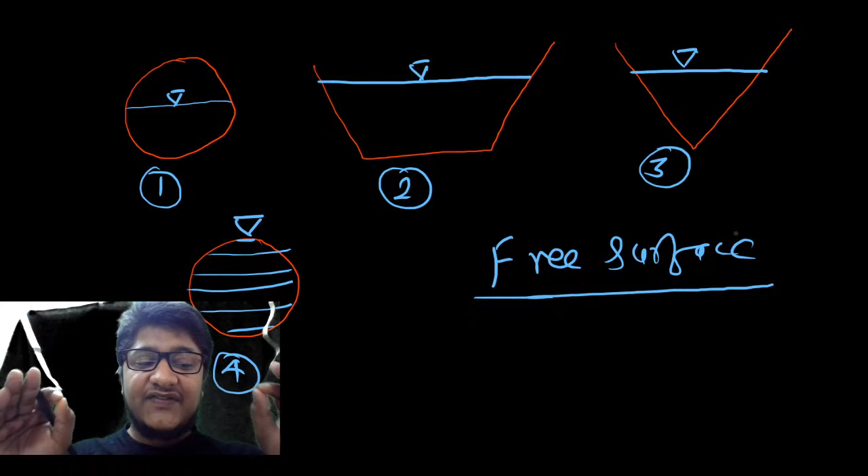I'm just giving you a small and clear definition to all of you. Free surface is the interface between a moving liquid - in our case that is water - and an overlying fluid medium. That overlying fluid medium is nothing but air, that is atmospheric air. So wherever you will find a fluid is moving, that fluid here it's water, so wherever the water is moving and over that air is overlying, that interface we call as free surface.

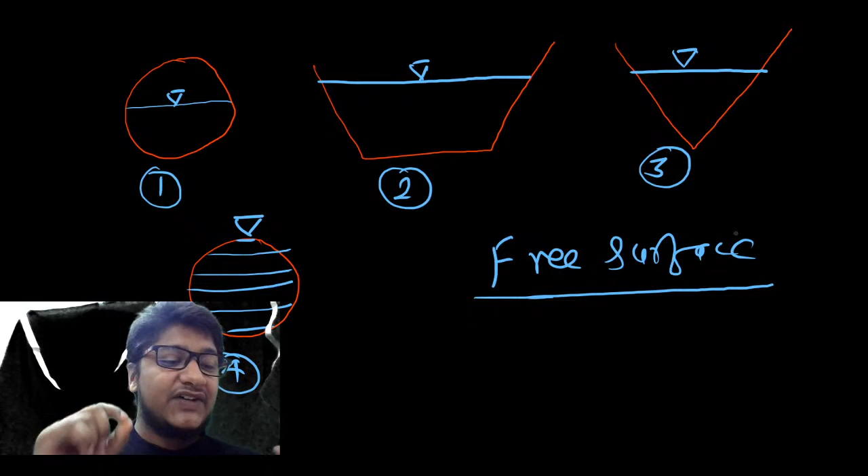And this interface we will find in every diagram. Like the first diagram, you will find here, this is the interface, because this is air and this is water. Here also this is water, this is air. So this is the interface. This is the identification mark of open channel flow. You can find, or you can tell, or you can explain, or you can select the open channel flow just by seeing this free surface.

So what happens with this fourth diagram? Why is this not an open channel flow? This is the question - what happened with this fourth diagram?

I think I have already told you in the environment part while explaining the design of sewer what is the difference between a pipe flow and a flow in pipe. This difference already I told you, yes or no?

In that fourth diagram, if you notice, full flow is happening, and whenever in a pipe full flow is happening, we call it pipe flow. Whenever in a pipe full flow is happening, that flow will not be because of gravity, that flow will be because of pressure. In that pressure flow you will not find a perfect free surface. Are you able to find that free surface in this diagram? No. Here you are able to find it, here you are able to find it, here you are able to find it. So in diagrams 1, 2, 3 you are able to find that free surface, but in diagram 4 you are not able to find that free surface. That is the reason, friends, in the fourth diagram it's not open channel flow, it's pipe flow. So whether you have understood this point or not.

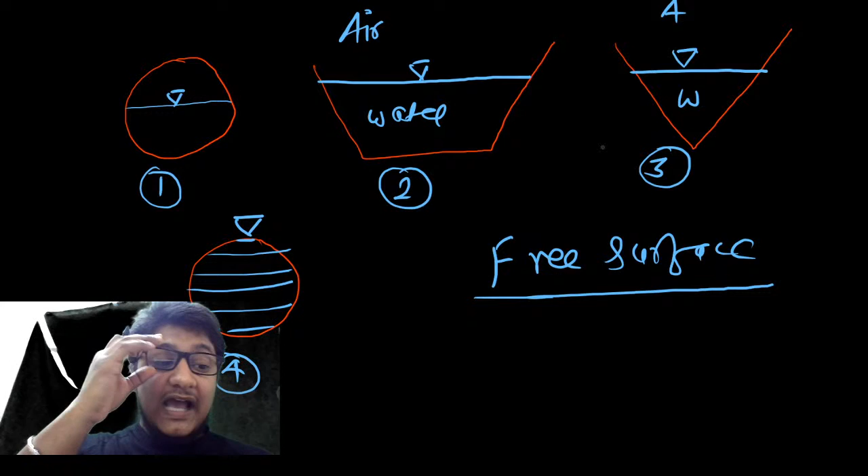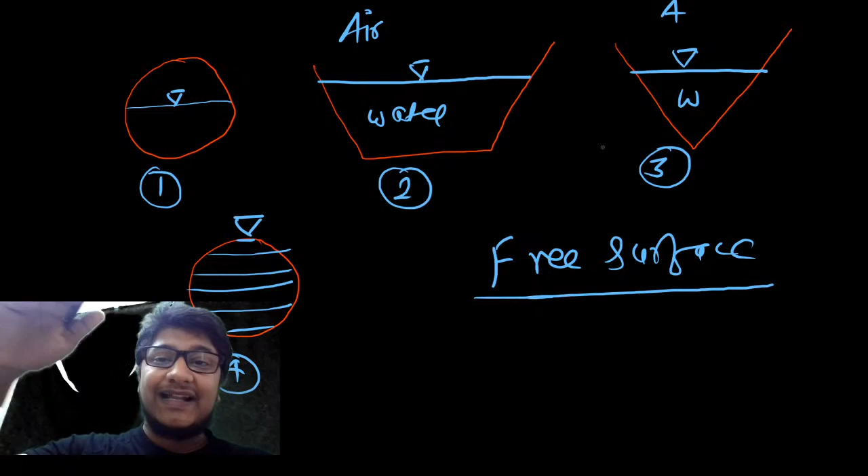Now see, free surface is the interface, but not all interfaces we call free surface. Only that interface in which a moving medium, that is water in our case, is overlined by air or overlined by a gas, that is what we call free surface. Like if you are mixing air and if you are mixing oil and water, in that also one interface will be there, but that interface we cannot call free surface.

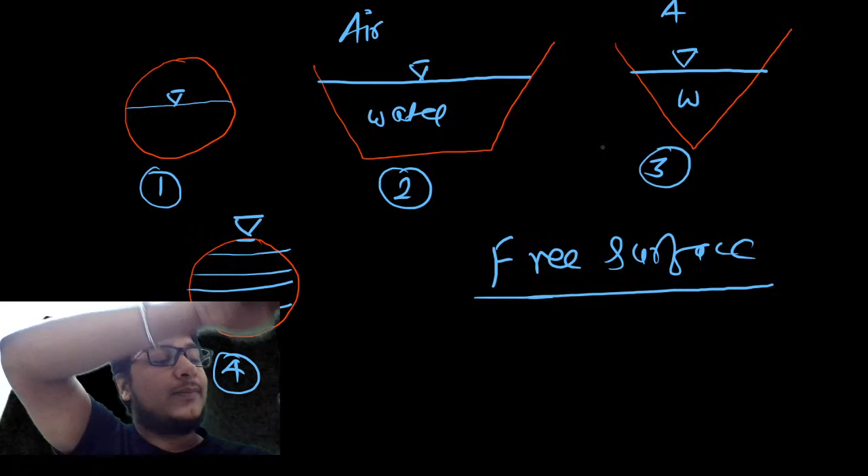Does it make sense? Shailesh has doubts, sir. What is it, pipe flow or flow in pipe? That is flow in pipe. There is a pipe, and inside the pipe flow is happening, so that is flow in pipe. But in that pipe, flow is not going through full depth. It is going through partial depth, and whenever it is partial flow, air will enter. Air entering means that moving water is overlined by air, and in that case we call this a free surface, and with that free surface it is called open channel flow.

Yes, Lakshmi, your point is clear. In pipe flow, we call it pipe flow when the flow is full. Whenever the flow will be full, it's because of pressure, the dominating force will be pressure. And whenever the pipe is not full, that means some air is present in it, or air is overlaid, so in that case we call it open channel flow.

Is everything clear? Everything is clear or not? I'm going through very basic things, guys, so if you have any doubt, please ask.

Yes, very good, Hacker Khan. The first case, the example is sewer line, that I will introduce you, that I will tell you, but as Hacker Khan is telling, I'm just quoting that part.

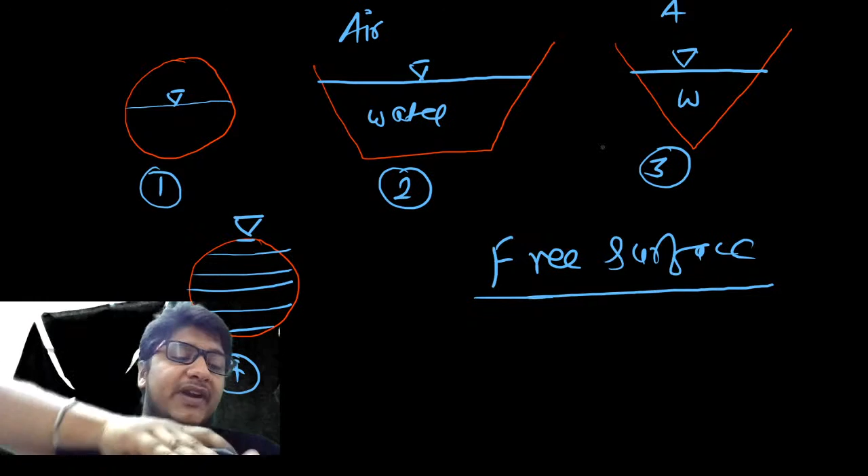Top portion closed or open, no effect. We only want a moving liquid and above that an overlying fluid medium. That's the only thing we want.

Open or closed, no need to worry about that. We only need to see one thing. That's the reason I told you, wherever you find a free surface, you can blindly tell this is open channel flow. But you have to be very clear about the definition of the free surface. What is free surface? I'm telling you again.

If you want, note it down. Free surface is the interface between a moving liquid and an overlying fluid medium. Everyone note it down, this is the definition of free surface.

On the free surface, pressure will be uniform and constant throughout the length of flow.

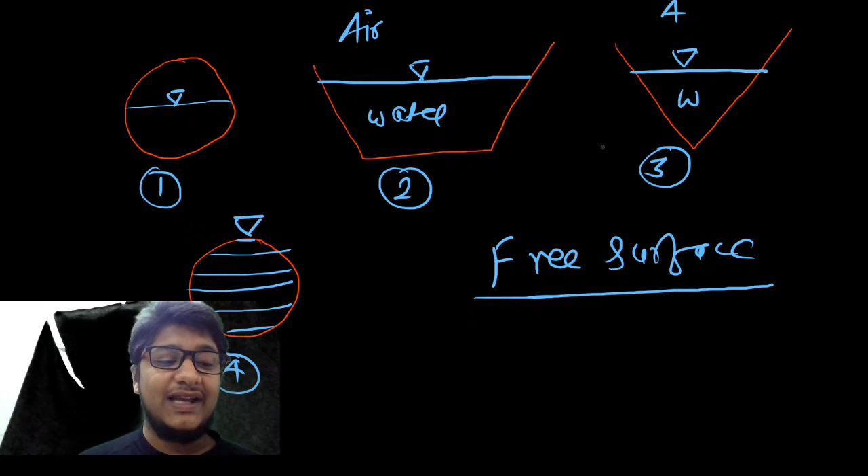Is it clear? Is the point clear?

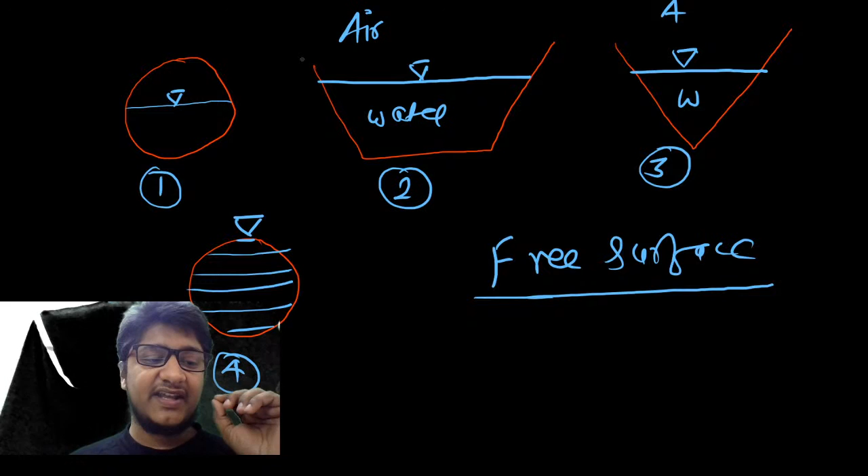Below that, everyone write down: in civil engineering, that moving liquid is water, and the overlying fluid medium is atmospheric air.

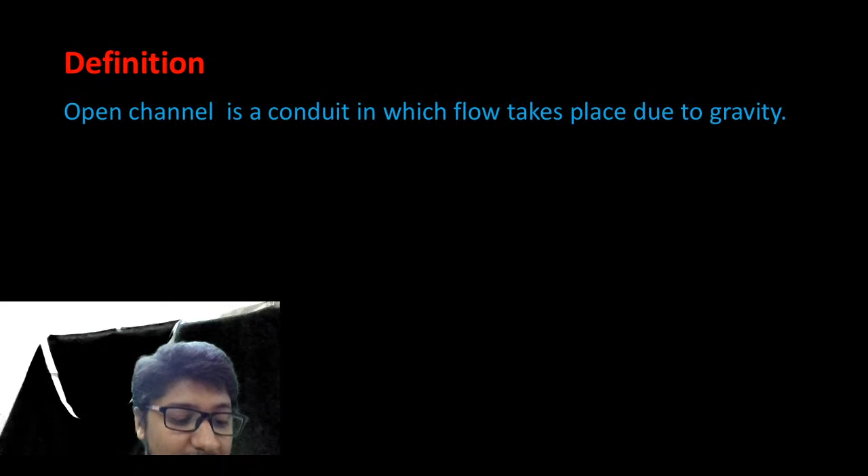So is that point clear to all of you? Because we are moving to the next slide, the definition part. I think it's already clear, but I'll clear it again. Yes, Avinash, flow in barrage, river, everywhere we only go for open channel flow. That is the reason open channel flow has come into your topic, and that is why we are discussing it so much.

So coming to the definition part, understand this, guys. Open channel is a conduit in which flow takes place due to gravity. Open channel is a conduit, conduit means pipe, in which flow takes place due to gravity.

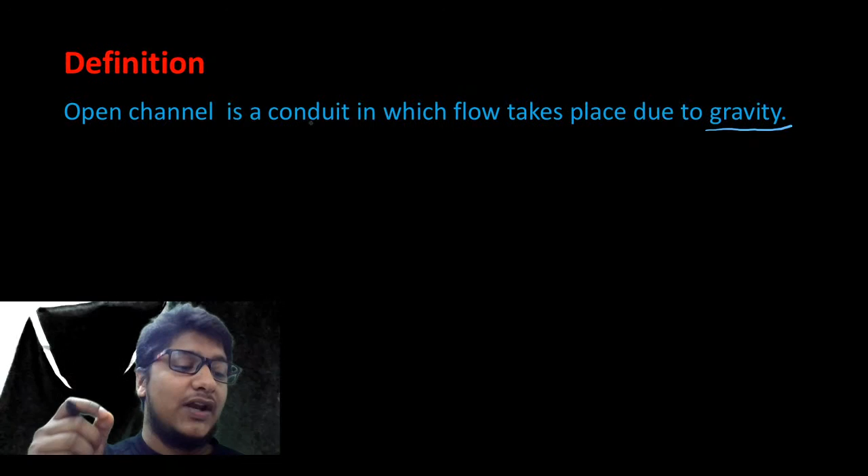Now again the basic concept. If the flow is because of gravity, which law will be useful? Which dimensionless number will be helpful for us to define that? Can you guys tell me? If you have studied the FM part, you can definitely tell that. If not, it's okay, I will tell you. Which dimensionless number will be helpful for us to define that?

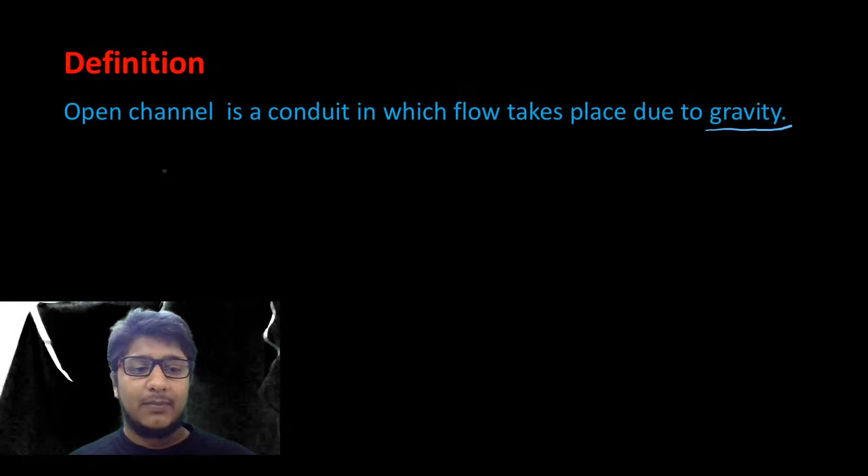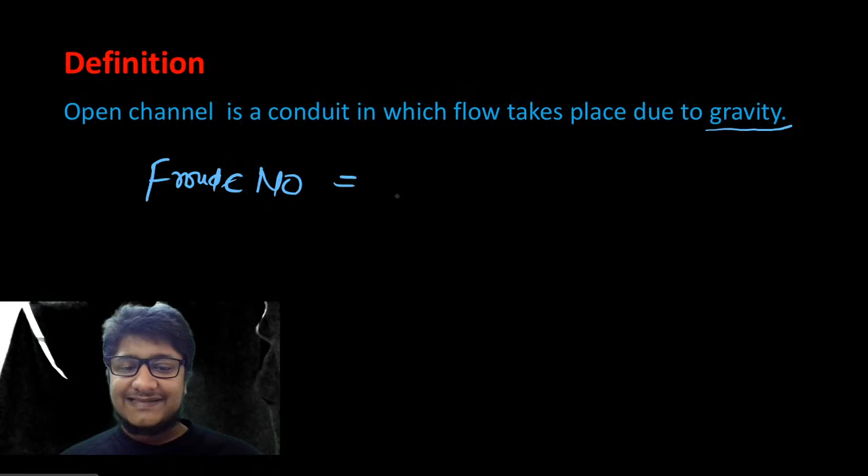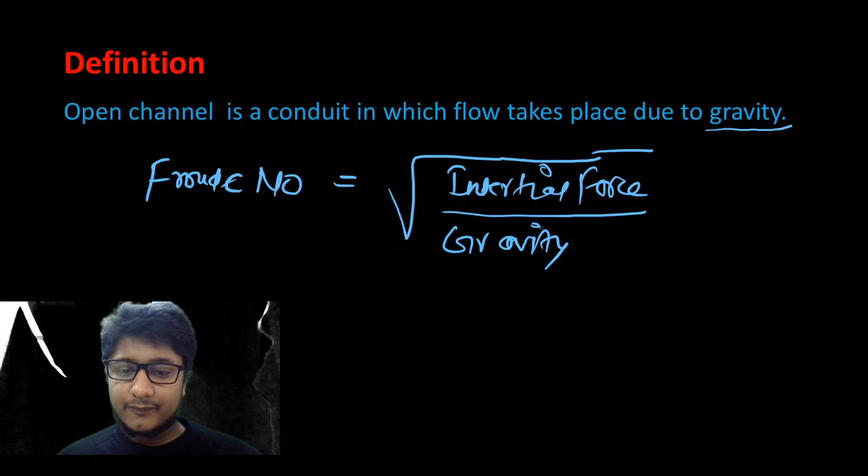It's the ratio of inertial force upon gravity force, inertial force upon gravity force.

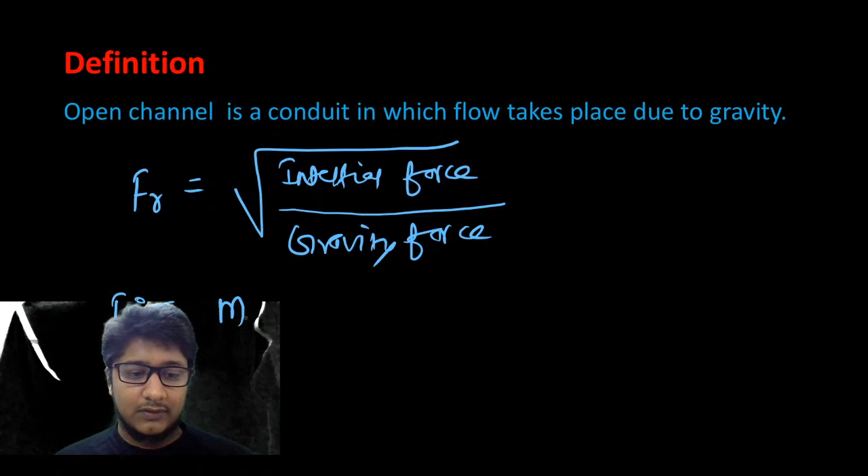Okay, I will write on the right side part, thank you for the suggestion. So what is Fi? First First of all, that is mass into acceleration, and you know acceleration can be written as velocity upon time. This mass upon time we can write as mass rate of flow, you should know this, you've studied it in FM.

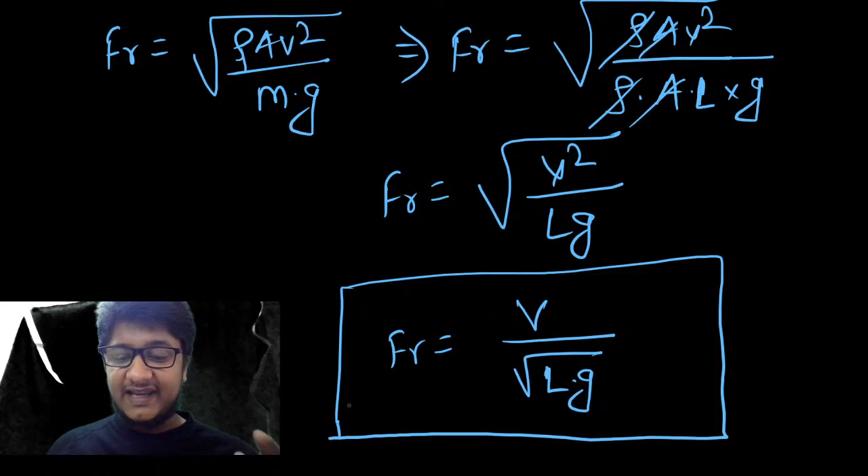Here I think you all have understood what is Froude number, that is v upon root under Lg, and this L value will change whether it's a circular section or non-circular section. That I will tell you when it will change and how it will change. That I will tell you later. Is that clear? Anybody having any doubt? They can ask me, or else I will go to the next part.

Faizan is asking, sir, in open channel flow, how dia will come? Faizan, as I told you, right now I have only given you the derivation of the Froude number formula. I will tell you in detail why diameter will come in circular section and why diameter will not come, or what thing will come in non-circular section. I will tell you that. Don't worry.

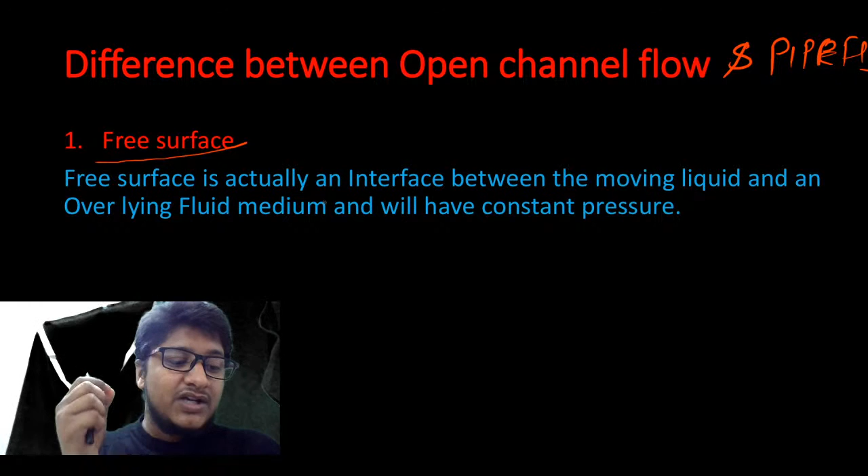Now if I tell you about negative pressure, can you guys tell me any example where you have seen negative pressure in a pipe? That example many people already know.

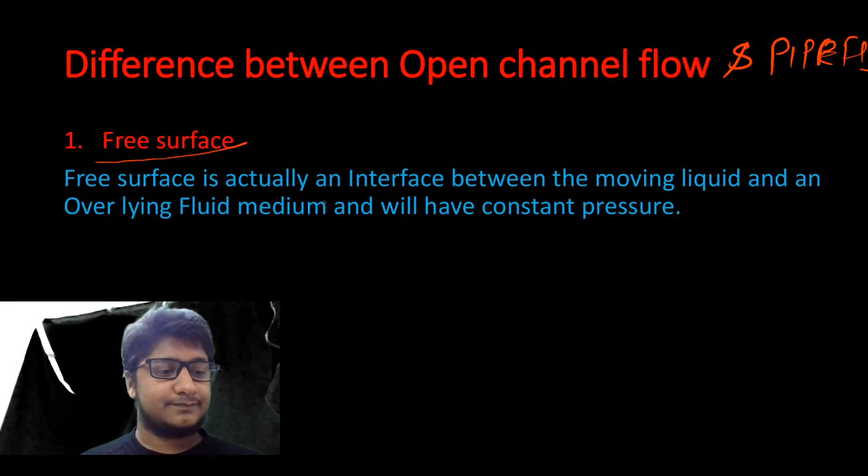Very good, Shubham, very good. It will be a siphon pipe. Since in a siphon pipe, you know that negative pressure also develops there.

That's something we call vacuum. Yes, petrol. Lakshmi, have you also taken out petrol from your father's bike? Oh, that's great, good to know that.

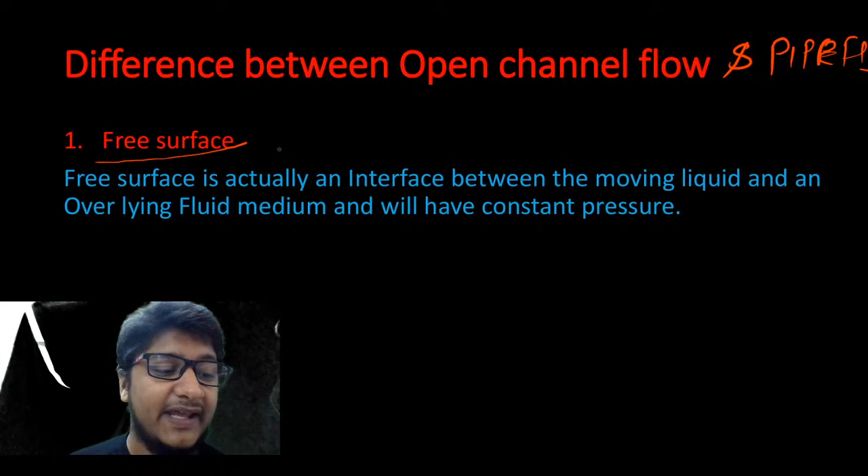So sometimes fluid mechanics is required for a thief also. They also know that fluid mechanics has a very wide application. So without knowing the siphon pipe concept, if somebody is taking out petrol from your father's or friend's bike, that is not good - you have to know the basic concept also for that. Then in less time you will be able to take out more petrol.

Is that clear? Did you understand the pipe flow part - how with the help of free surface we have differentiated open channel flow and pipe flow? Yes or no?

So next parameter is direction of flow. Avinash mentions piston, yes, that is also one of the examples - in a piston also we try to develop vacuum pressure in such a way that water can be sucked out.

Now let's talk about direction of flow. First I will talk about open channel flow. In that, this is your channel bed. Everyone look here - this is your channel bed, and this is your water surface line.

And this is your total energy line. And this thing I am taking as reference - this is your datum line. Everyone understand that part?

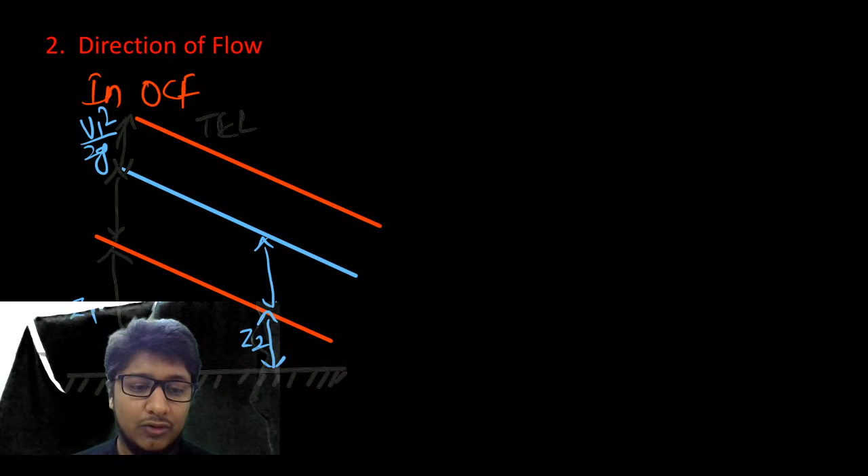How can you find out the pressure head? Can you guys tell me? If you have studied FM, can you tell me how we can find out the pressure head part in open channel flow?

In open channel flow, how can we find out the pressure head part? I'm not asking you the formula, I'm just asking you the measurement device. Can anyone tell me any device?

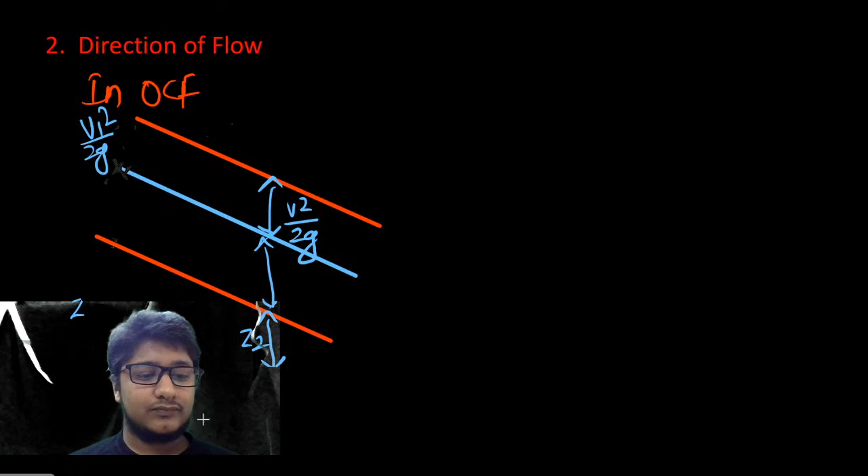So this is your datum line. Now I think you can see this part, this color is visible, guys. So some people are telling barometer, some people are telling pitot tube, some people are telling piezometer. Everything, whatever devices you know, tell me everything. Somebody will tell venturimeter. Very good, very good.

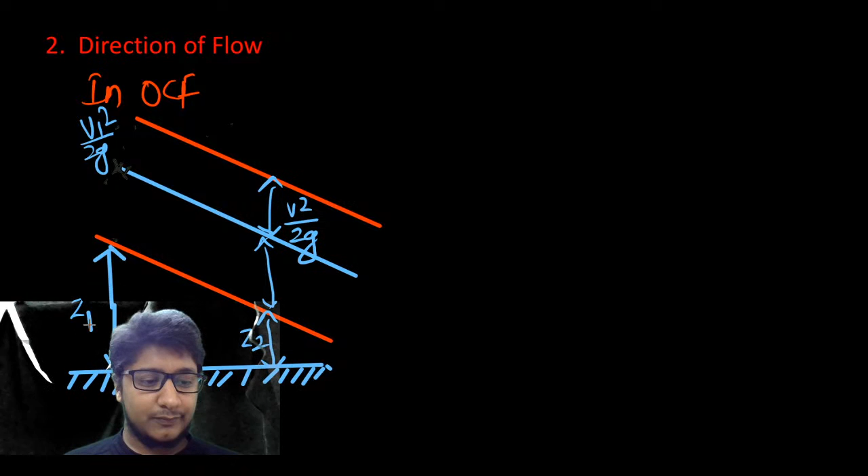Okay, so Lakshmi, that is a crime. If you are telling piezometer for velocity, that's a crime, Lakshmi. Understand everyone, the device which we will use to find out the pressure, that is pressure head, is the piezometer.

So you know that whenever we insert a piezometric tube, up to what level will the water come? Can you guys tell me? For example, I will show you that. If I insert the piezometer here, up to what level will the water come? Can anyone tell me?

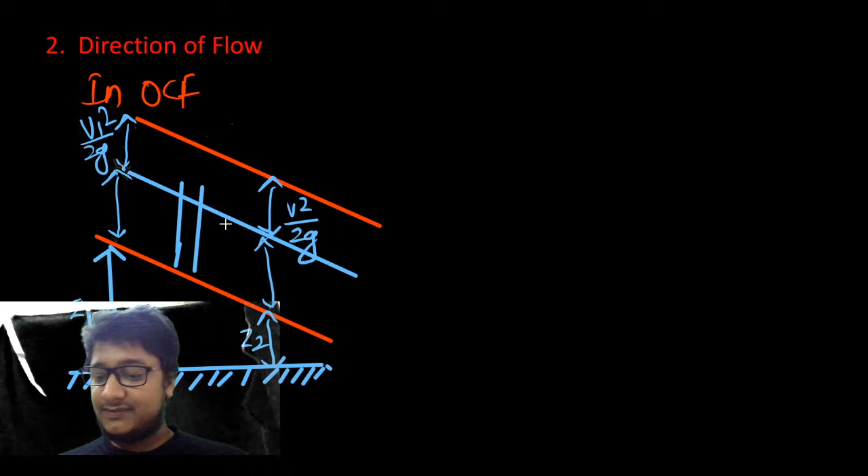If I use a piezometer, can you guys tell me up to what water level it will come? As soon as you insert the piezometer, water will rise. So up to what level will that water rise?

Lakshmi is having confusion between piezometer and pitot tube. Lakshmi, this part I have to deal with in FM, but just for you I am telling you: piezometer is for pressure measurement and pitot tube is for velocity measurement. That is a totally different part. Pitot tube is based on the Bernoulli principle and piezometer is based on the manometric principle. So totally different things - one is a pressure measuring device, one is a velocity measuring device.

Whoever is telling barometer - barometer is for atmospheric pressure measurement, not for water pressure measurement.

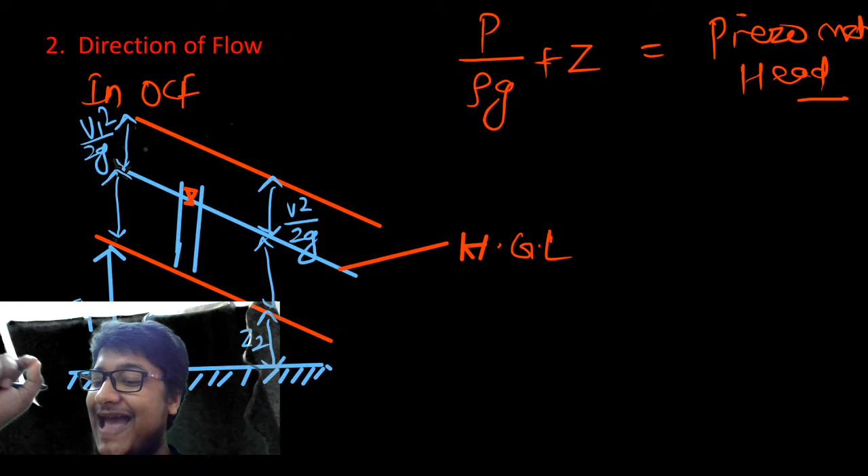Whether you guys are aware of gauge, absolute pressure and these things or not, because you are asking too much doubt regarding that. Do you know what is gauge pressure, what is absolute pressure, what is atmospheric pressure? If you guys will reply no, then I will explain that part also, because it's very important for you to understand. What is absolute, what is gauge, and what is atmospheric pressure, because I will use that term so many times. I want a reply from all of you guys.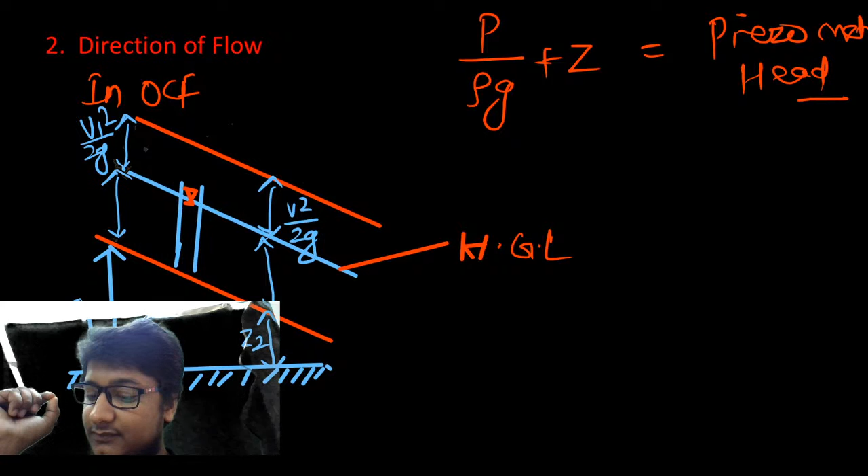Yes, Faizan, piezometric head remains constant at all points of HGL. Okay, so you guys are telling me you don't remember, so before going further I have to explain that part because you guys are asking this question.

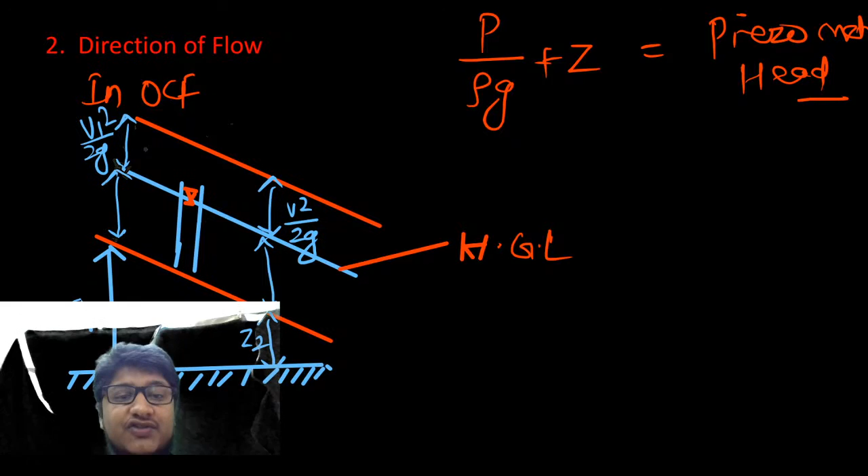Okay, so for you guys I'm explaining that part. What is absolute pressure, what is gauge pressure? That's a very basic thing. Okay, listen everyone, now everyone understand that part.

See, this is your zero pressure line. This is your zero pressure line. Everyone understand? Then I will ask you a question also. Zero pressure line. Now in this part, see, this is your zero pressure line, this is your atmospheric pressure line.

Now you will ask, sir, where did this atmospheric pressure come from? See, you know that above you so much amount of air is there, and you know that air will give some pressure to you. Yes or no?

That is the reason if you are going above on the hill surface or hill part, you are feeling a little bit uncomfortable. Why? Because if you are going above, the pressure is going down. Why is it going down? Because that pressure is a measure of rho g h.

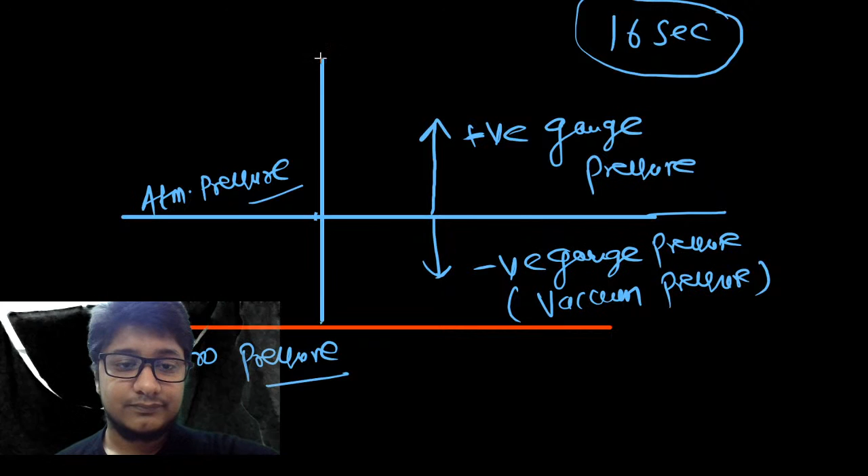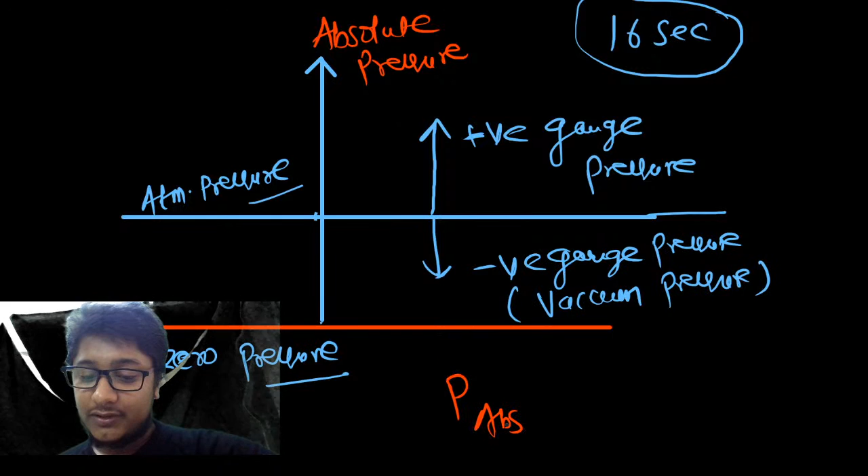Now understand this. If you are measuring your pressure from zero level, then this pressure we call absolute pressure. So I'm just giving you a general definition.

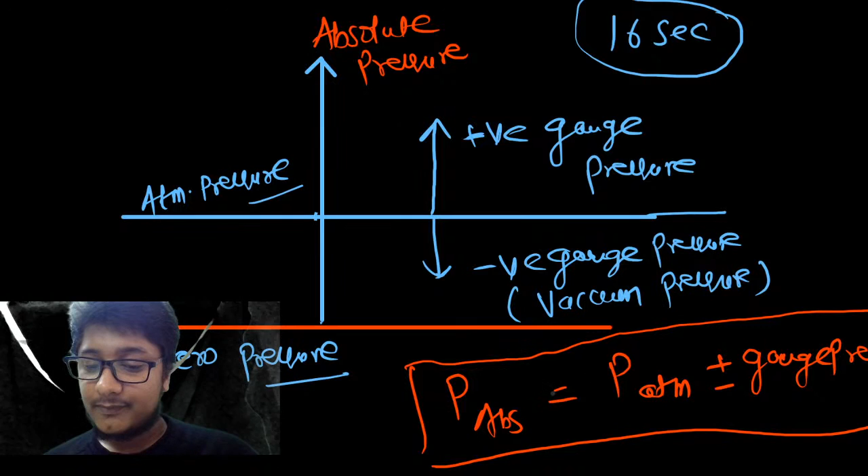P absolute will be equal to P ATM plus or minus vacuum pressure or gauge pressure. Don't say vacuum, always use gauge. This formula you need to remember. P absolute pressure will be equal to P atmospheric pressure plus or minus gauge pressure.

Why have I written the plus and minus part? Because you know that gauge pressure can be negative also, meaning it is lesser than atmospheric pressure, and it can be positive also, meaning it is more than atmospheric pressure.

With respect to atmospheric pressure we call it gauge pressure. How much pressure is more or less, that's what we call gauge pressure, and the reference point of it is atmospheric pressure. The reference line I have drawn is atmospheric pressure. Why have we taken atmospheric pressure as a reference line? Because it is present at each and every place at the same level.

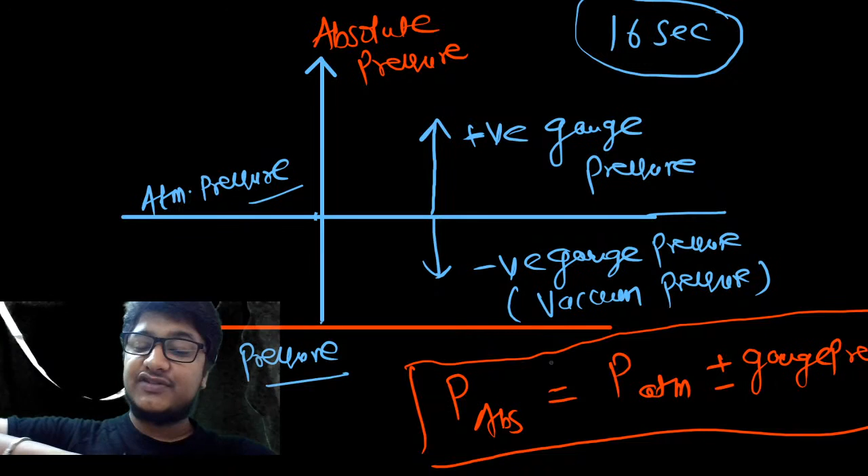If you are not changing the elevation, if you are not changing the height. If you change the height, atmospheric pressure also changes. So this time I'm talking about the whole ground level part, assuming you're talking about the same ground level.

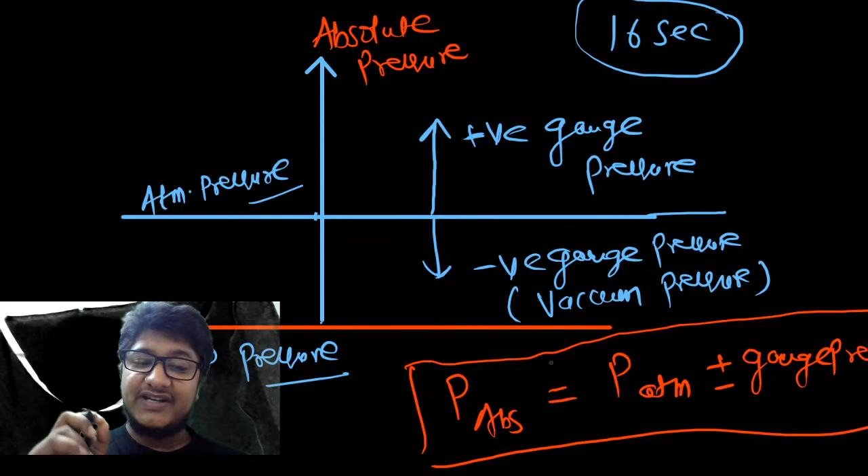So is this point clear to all of you? Is this point clear? Is the absolute pressure part clear to you? Yes or no guys? Is the point clear or not? Is there still any doubt?

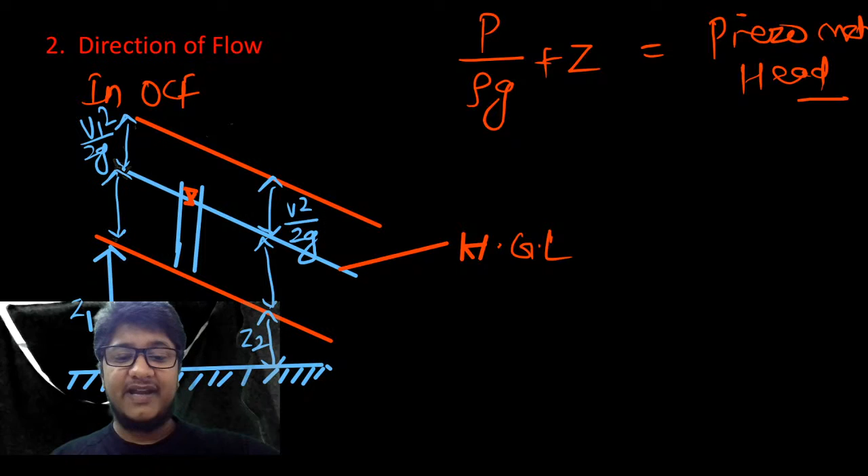Absolute pressure we have to measure from zero level. Whatever gauge pressure you have, you add it with atmospheric pressure, then you will get the absolute pressure. That is the reason I have given you the formula also: P absolute equals P ATM plus or minus gauge pressure.

Does this make sense? Everyone understood this point? Today's class is more about basics only, because tomorrow you will be in trouble if I don't clear your basics. Otherwise tomorrow you will keep asking me the same question again and again. So it's better to clear all your basics here today itself, because from tomorrow our main content will start and I don't want disturbance at that point of time.

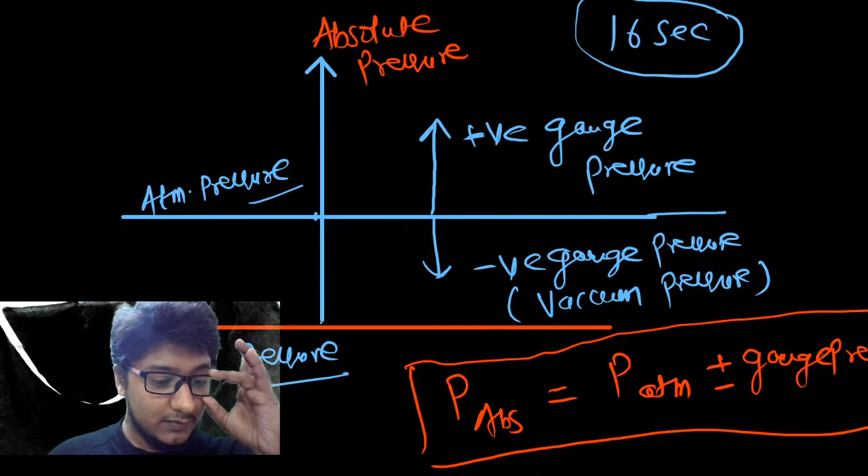Yes, Lakshmi, if pressure is more than atmospheric pressure we call it positive gauge pressure. If it is less, then we call it negative gauge pressure, and a different name for it is vacuum gauge pressure. What is the other name for that? The different name of that negative gauge pressure is vacuum pressure. Is your doubt clear or not, guys?

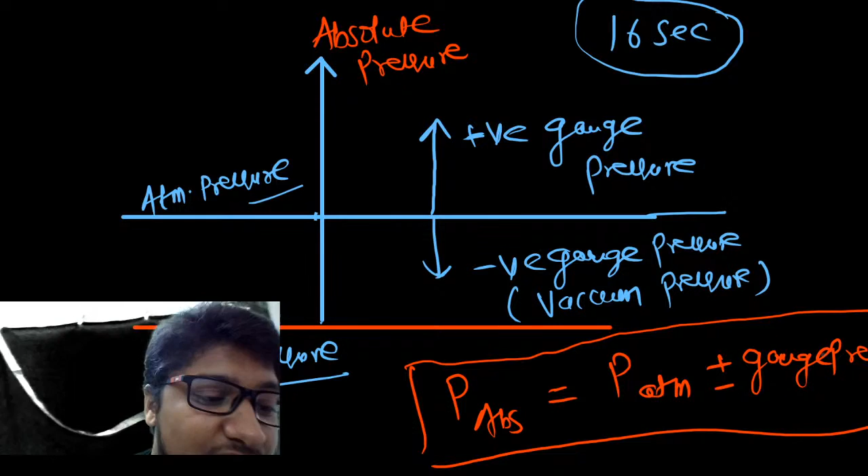I am telling you this extra part. This is the problem with me, because I am a teacher of fluid mechanics also. If you guys have doubts in your basics, it's my weakness that I have to clear that part. If you guys have any doubt in fluid mechanics, it's my weakness that I have to clear it.

So we have slightly distracted from our topic, but I hope this point is also very important for you to understand, otherwise you will ask a lot of questions. So can we go to the topic we are discussing?

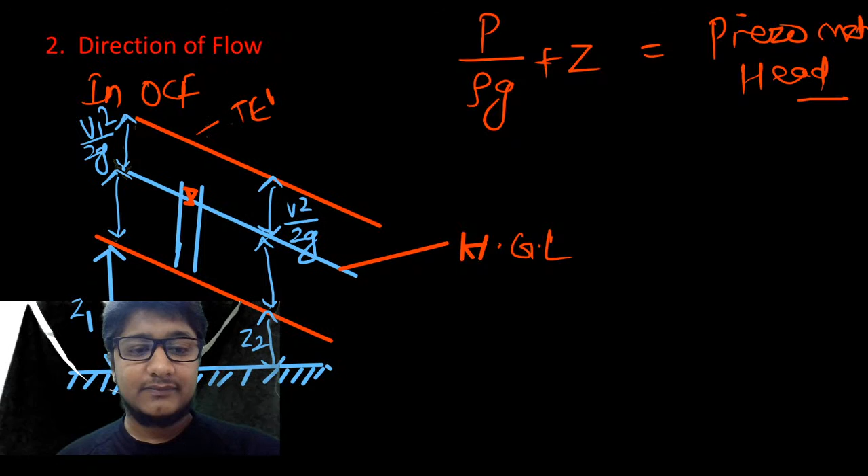That is the direction of flow. So here, if you look at this diagram, this is the TEL line. This is the TEL line. And this is the HGL line. This is the HGL line.

So if I will say the flow is happening from the first point to the second point, or second point to first point, tell me. That's my question to all of you guys.

I know this drawing I have made on the left part is a bit of a problem for you. I think previously the picture used to be on the right side top, but it's changed, so I need some time to get used to that. Okay, so sorry for the disturbance, guys. From tomorrow onwards, everything will be okay. Not only tomorrow, from this evening also.

Small thing we'll discuss, Ishan. Small thing we'll discuss, and then you can start your work.

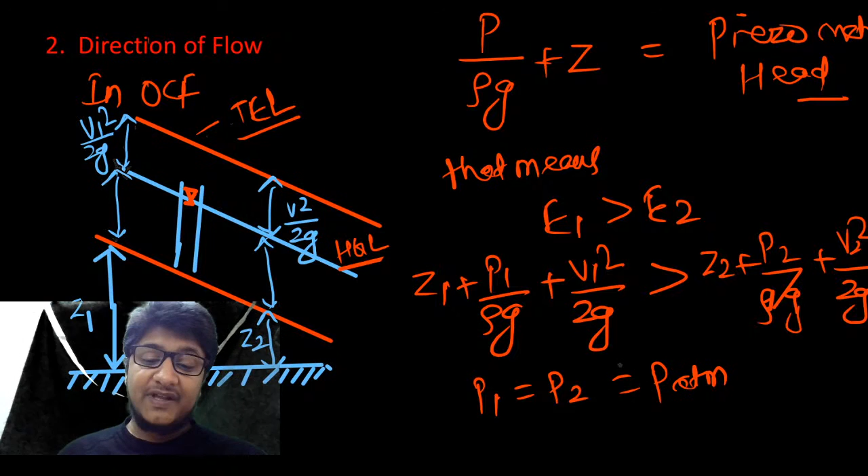Okay, everyone look here. As you know, whether it's P1 or P2, both are atmospheric pressure, because atmospheric pressure is not changing throughout. Pressure is not changing along the length of flow. So if pressure is not changing along the length of flow, P1 and P2 are going to be same. So I'm cancelling this part, P1 and P2.

Now second thing, what I'm assuming is that it's a uniform flow. If I'm assuming this, I have to write it on the next page. So, if I'm assuming that it's a uniform flow, you know that in uniform flow, parameters like velocity and depth will not change along the length of flow. This is the definition of uniform flow.

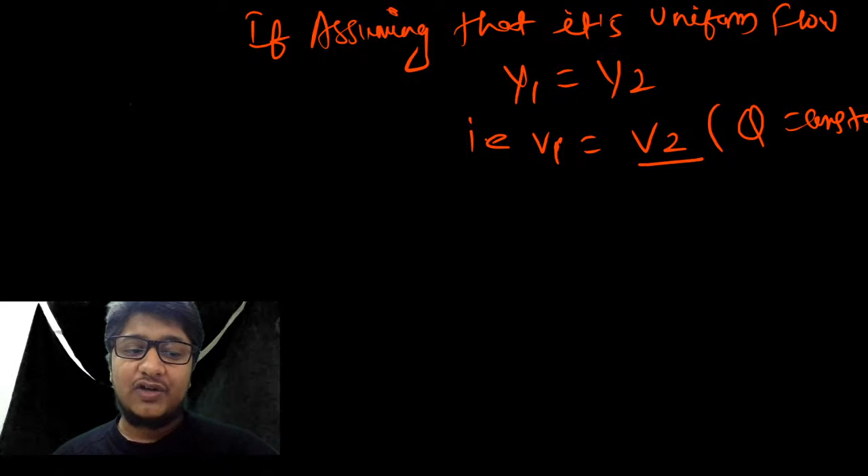So what happens, y1 will be equal to y2, and if y1 equals y2, Q is not changing. So you can directly say v1 will also not change, that means v1 is equal to v2. Why is this happening? Because Q is constant, and your discharge is constant. Q equals area into velocity, and area is nothing but width into y into velocity. Y is not changing, width is always constant, and v has to be same, then only this Q will be constant. So v1 and v2 will be same.

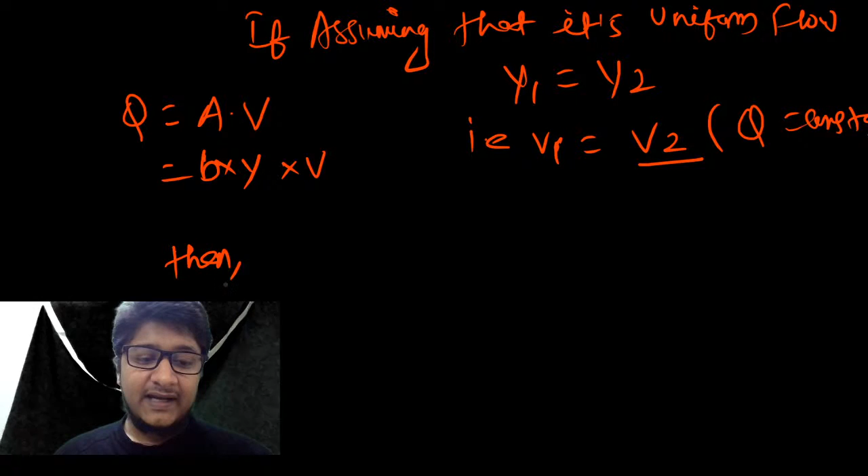That means for uniform flow we can cancel out this part also, v1 square upon 2g. So what are the things remaining for you? It is decided that in open channel flow, Z1 will be greater than Z2 is the condition of flow. Specific energy line, don't talk about that point. We will discuss that later, not right now, but we will discuss it also.

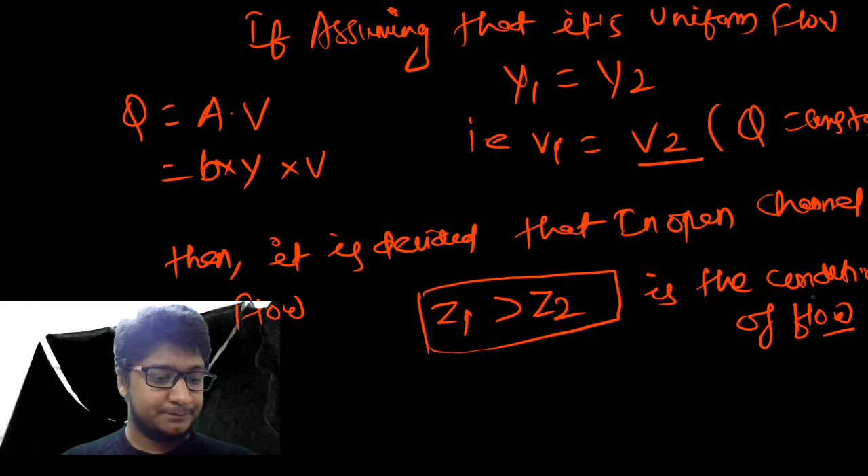Don't say pressure at point 1 should be greater than pressure at point 2. Every place it is atmospheric pressure. Pressure will be same everywhere, guys. Pressure is not changing throughout the motion of any river, lake, or drain you are making. Pressure will be uniform, that is the reason we have cancelled that part, P1 upon rho g and P2 upon rho g.

Now coming to V1 and V2, why have we cancelled that part? To understand this, what have we assumed? We have assumed this is a uniform flow, and whenever it is uniform flow, depth of flow will not change, even velocity will not change. So if V1 and V2 are not changing, we can cancel out V1 square upon 2g and V2 square upon 2g.

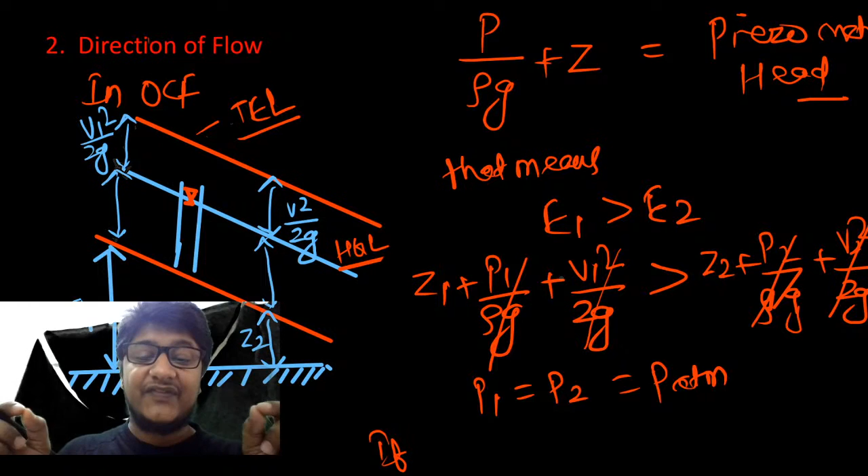So now the only thing remaining to make a difference is Z1 and Z2. In open channel flow, if flow is occurring, it always occurs because of the difference in Z1 and Z2. There is a difference in elevation head, and we call this as what? If there is a difference in elevation head, definitely you will find flow. This is what you call gravity flow. So in a gravity flow, we have to give a difference in elevation head, then only gravity flow can occur.

After this derivation, if you have noted down this part, you all have to write down one thing: in OCF, flow is due to difference in elevation head. Don't write piezometric, it's better to write potential.

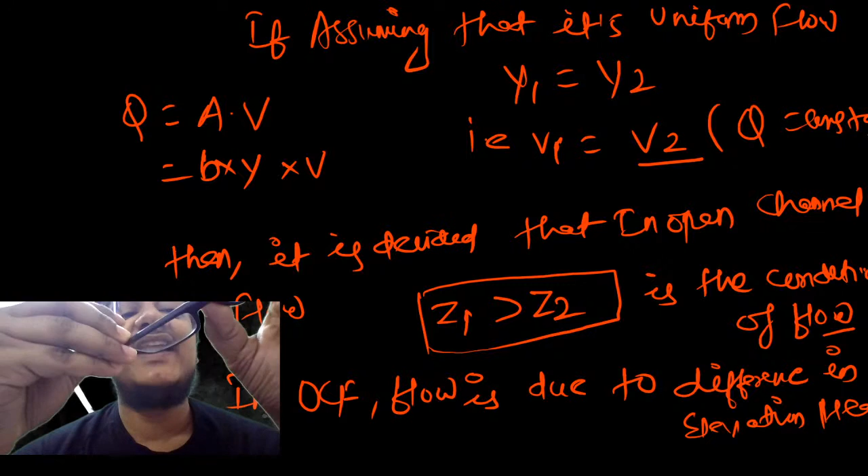And what about pipe flow? I've written down OCF, but what about pipe flow? Below that you can write: in a pipe flow, flow will occur if there is a difference in total energy head.

If there is a difference in total energy head, that's a summary. In a pipe flow, flow occurs only if there is a difference in total energy. But in open channel flow, if there is a difference in elevation head or potential head, flow will occur because pressure is almost constant, it's atmospheric pressure only.

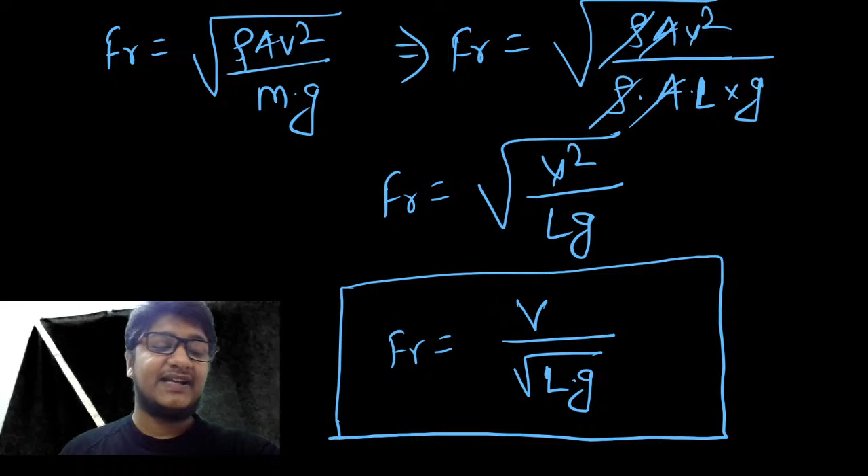So today what we have discussed, I will give you a small summary. We have started with the identification of open channel flow, discussed which book you have to refer, real life application, and the definition part, Froude number. The formula of Froude number you have to remember is FR equal to V upon root under LG.

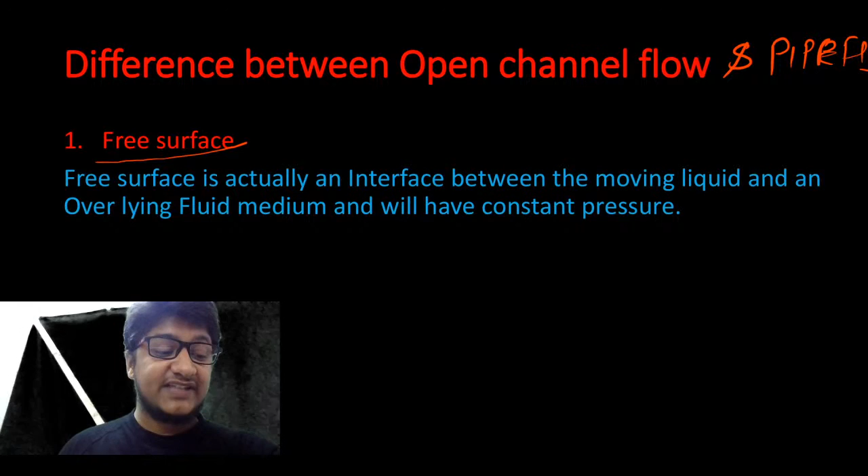Next, difference between open channel flow and pipe flow. The first parameter is the free surface. If free surface will be present, it is open channel flow. If free surface will not be present, it's pipe flow, not open channel flow. Next is direction of flow: in pipe flow, flow occurs only if there is a difference in total head. But in open channel flow, if there is a difference in potential head, elevation head, or datum head, flow will occur.

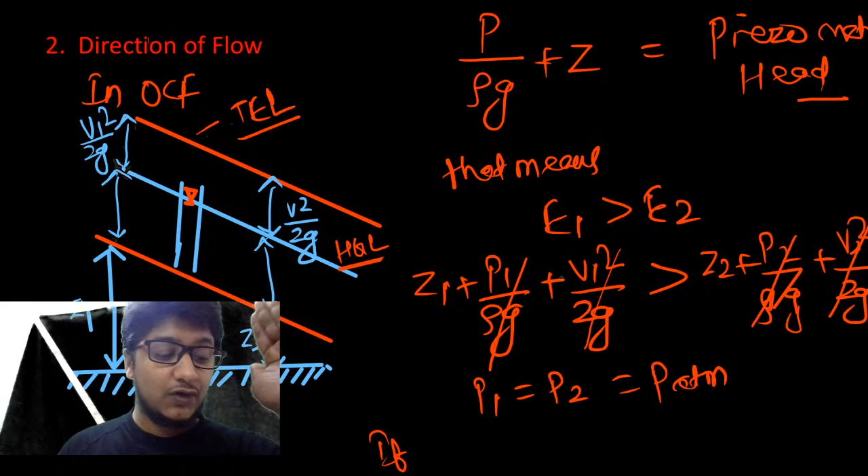In between, I told you about absolute pressure, gauge pressure, and atmospheric pressure also - what's the difference between these three and what is the relation between them. So these basic things we have discussed with you.

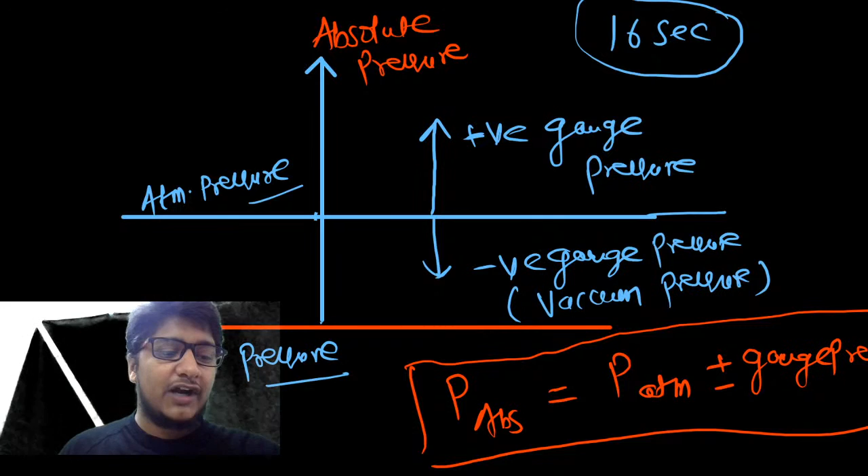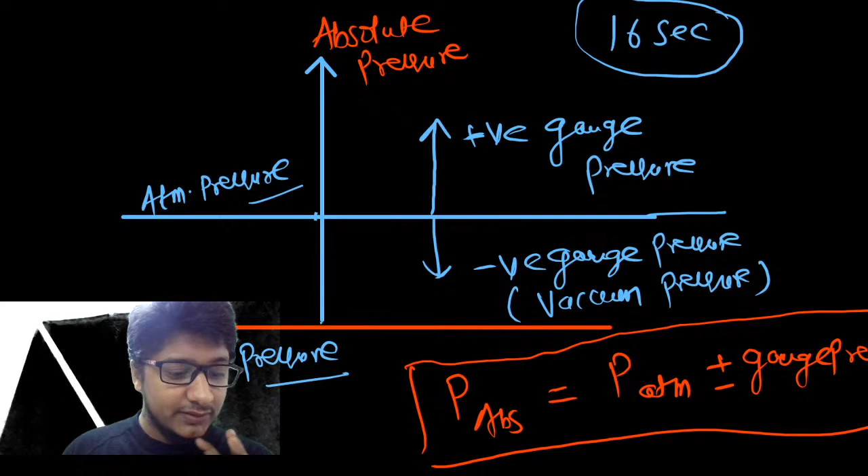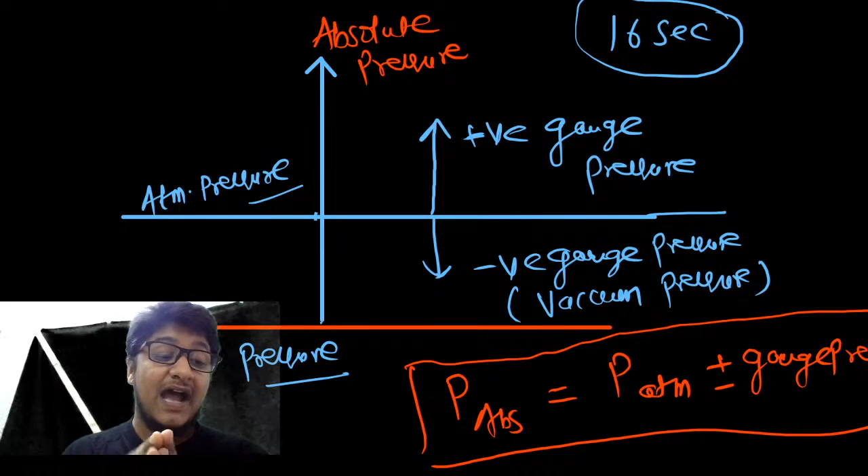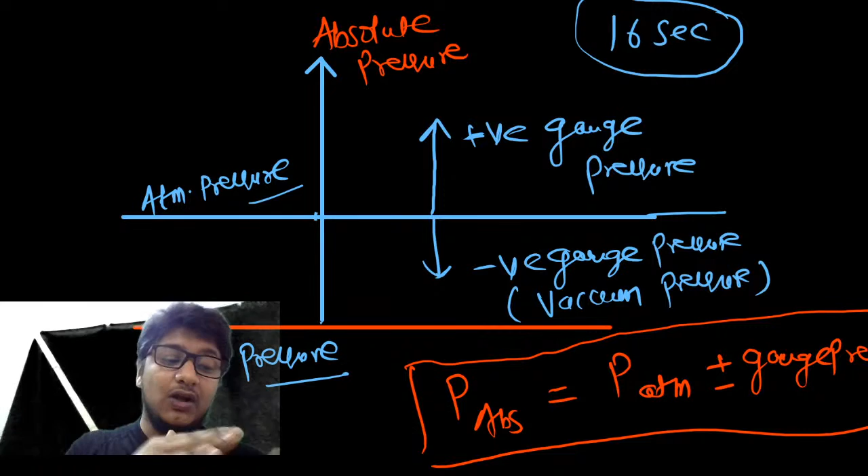And Sally's doubt is why V1 equal to V2, how it happened. Faizan, in pipe flow pressure can be different at 2 points, yes it can be different because pipe is a closed surface. There is no space for atmospheric air. If air goes into the pipe, for example in a sewer line, the flow becomes partial flow. In that case the air will go inside, and if air goes inside, pressure will become atmospheric pressure, so in that case pressure will be same.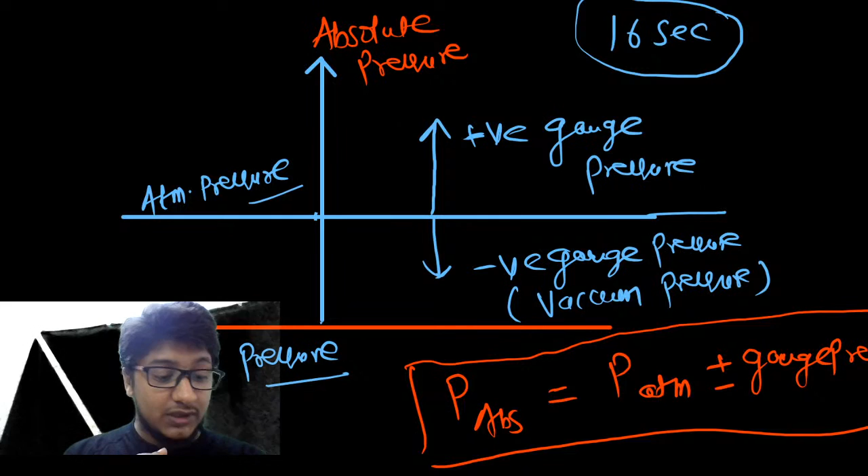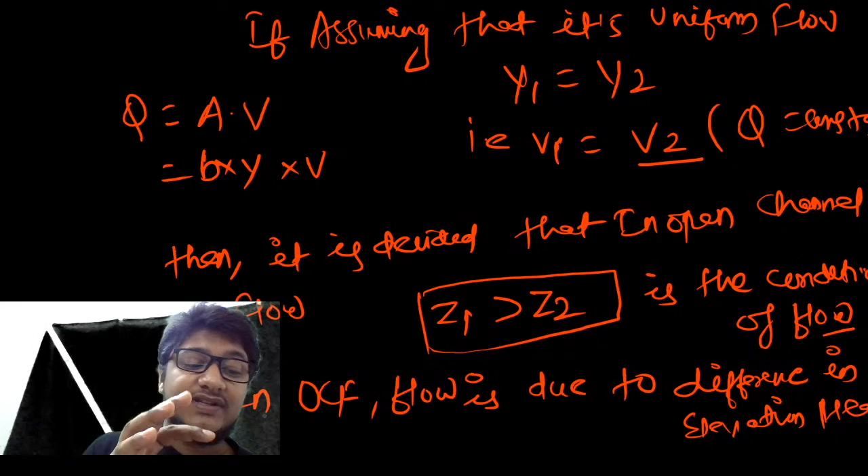Coming to Sally's doubt, as I told you, we are assuming uniform flow. Uniform flow means the flow parameters like velocity and depth will not change throughout a section, along the flow, at a particular time. In different sections you will not find any change in depth of flow. So if depth of flow is not changing and width of cross section is constant, then Q is constant - discharge will never change. Using Q equal to A into V, and A equal to B into Y: B is not changing, Y is assumed constant, so V has to be constant. That is why I have written V1 equal to V2, with Q constant in bracket. I hope you got this point.